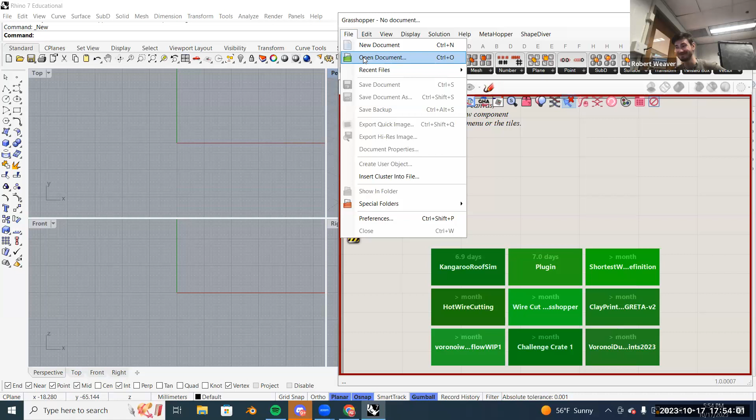So, did you ever 3D print Roadmap? Not yet. We can print a lot. I do want to print a lot. Yeah. Okay, cool. Yeah, that could be possible. I'll do this.

Okay, so let's do some Grasshopper. Leah, were you able to figure it out? Yeah, it's great. Several pages. Sean, what are you doing? Nice. There's some crazy stuff in there. Squiggle. Mesh inflation, that one's fun. But we already did Kangaroo, so we can only get to so much. Inflation shoe. Crystalline shoe. Okay, so today we're making a shoe. Let me open up this other file.

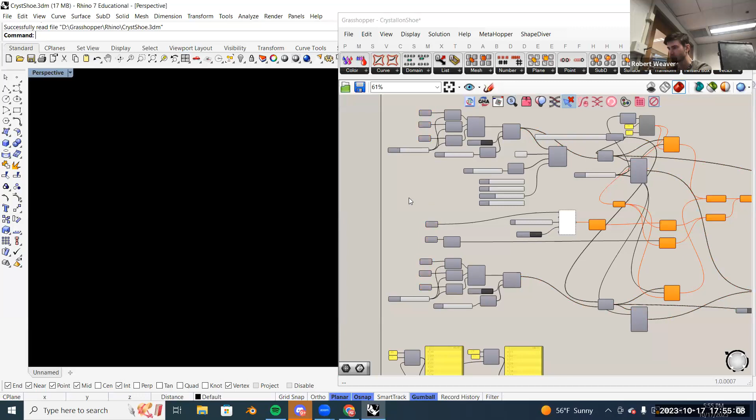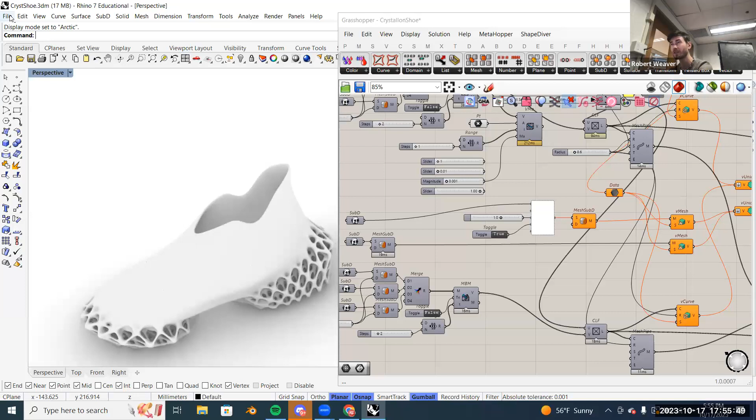This is the goal for today: the midsole texture, the lattice structure. I'm gonna give you this Rhino file because it has the upper and this middle bridge part. We can talk about how to make those pieces since it's with the SubD tools in Rhino 7. You need 7 to do that, or you could do it in Blender because they have very similar tools. But I'm just gonna give it to you.

Okay, so if you grab that Rhino file and open it up, it should have the mesh in there that you need.

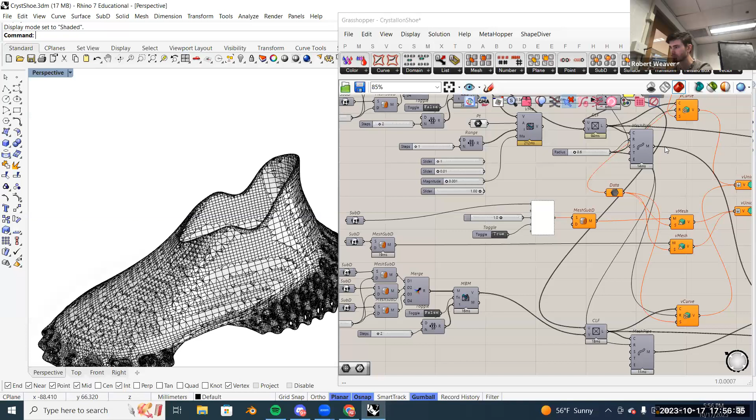No, wait, yes, I mean actually it would be. I can't not overhear you, so it was great, it was pretty gross, yeah. Did you hear the first part of it? Uh-huh, okay yeah. Joe Rogan's like on the show. It's like he was talking about it a lot. He was like, yeah, that was not okay.

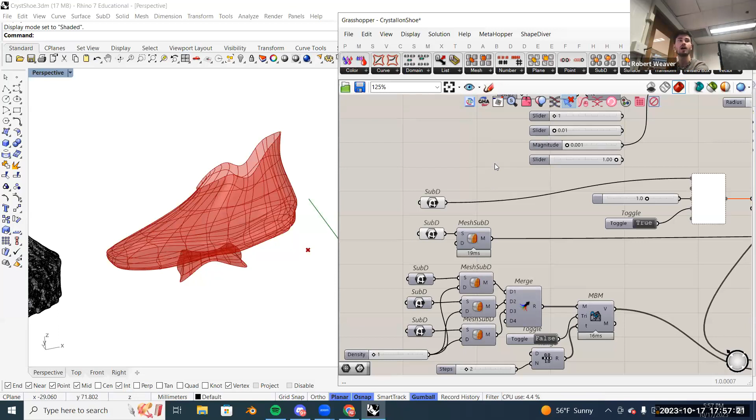Actually, with the people that have Rhino 6, let me know if it opens correctly. I mean it wasn't. It does not. Okay, let me fix that then, because you guys don't have SubDs at all. It has to be saved. Oh, I have a converter. Oh, I see what you mean. Okay, there's one, yeah, I can save it out as 6.

I was more interested in if the SubDs will come up.

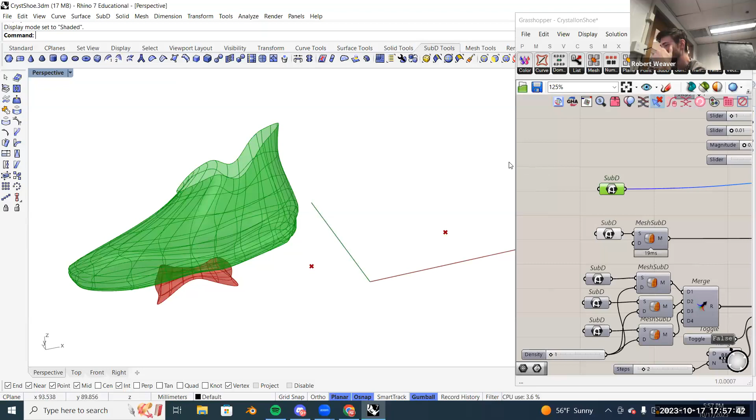It's been a long day. Yeah, I know it has. I haven't done anything on there, but it's still been on. I skipped my physical class, then did laundry and built the top words.

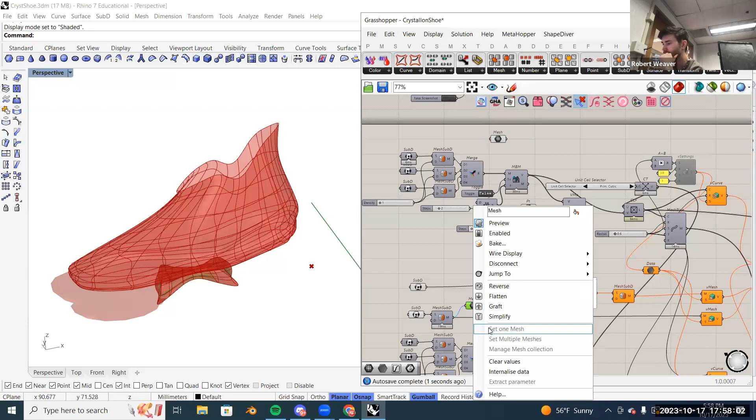This one was good. Yeah, I'll put a Rhino 6 there in a second. I'm just gonna change some things around just because SubDs I don't think will work.

Okay, grab that Grasshopper file, it should work in any Rhino. Does it matter if we... okay, yeah, that one, there's just meshes in the Grasshopper file to start with. The second one, yeah, the .gh one.

Wow, yeah, I had like 10 different companies like that and I still.

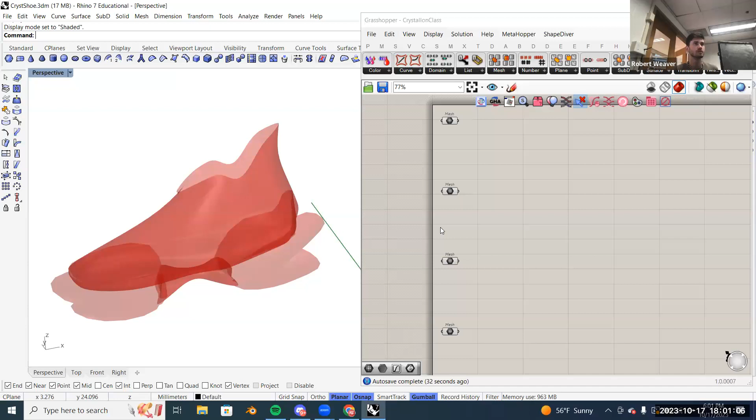Oh, I'm done, okay. But I don't know if the nodes just got their back or if they're deleted, because I clicked no a couple of times. Well, all I gave you was 4 meshes, there's nothing else in this file. So it should be pretty simple, I was assuming, because this has worked before, but weird.

Try to open the file, just the file. I go to file. No. Thank you.

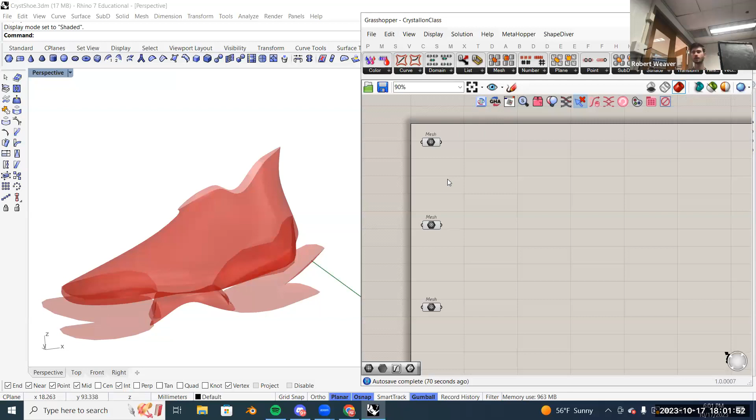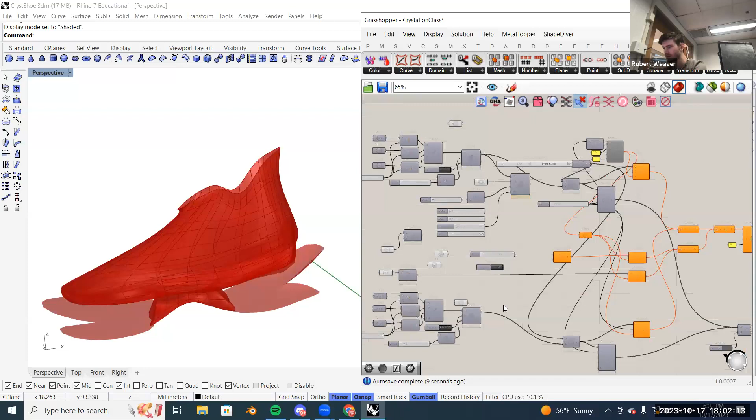Take something going at 1 speed and make it go 120 times less speed. It's like a gear. The input is the small gear, the output's the big gear. You get a bunch of torque.

That's the same, I was supposed to go on the sheet. How big is that? Depending on it, I have about 60. But I think I might have everything like that. Okay.

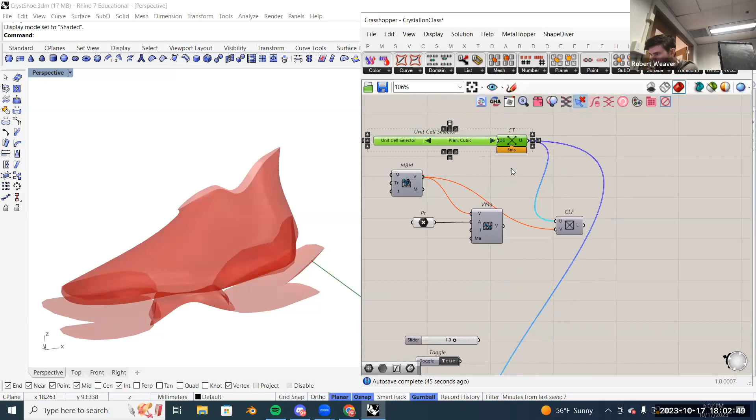Yeah, it's solid steel.

So the components of Crystallon is a lattice-based plugin, so it can do a lot of lattice structures. The nice thing about it is these aren't like plugin components, they're all just clusters of other Grasshopper components. So if you want to dive into them, you can see how it was built. But because they're just Grasshopper components, you should be able to open the file with the components in it, and you'll still have it even if the plugin's not working, which is nice. Let me know if that works and you can see them.

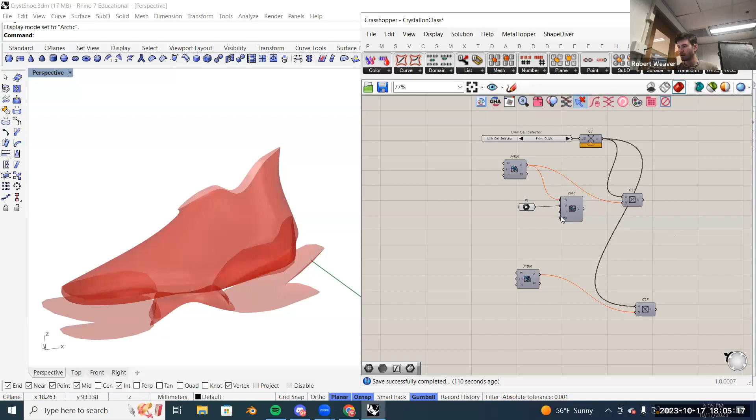Okay, everyone else, everything working so far? You got it all open? Cool. So we're gonna take the shoe form and convert that into the final model I showed a second ago, with the midsole and the parametric texture on the bottom.

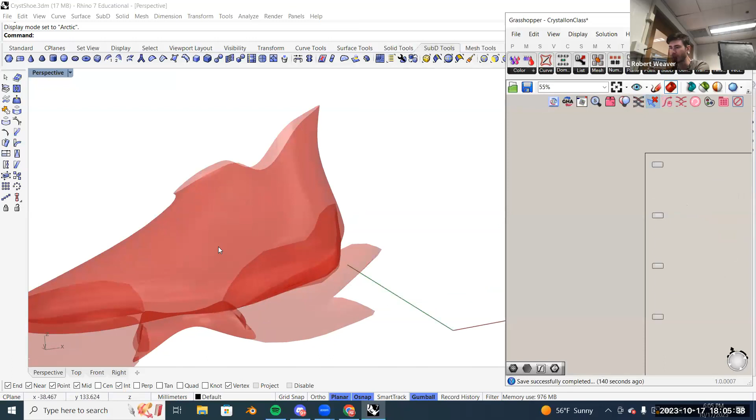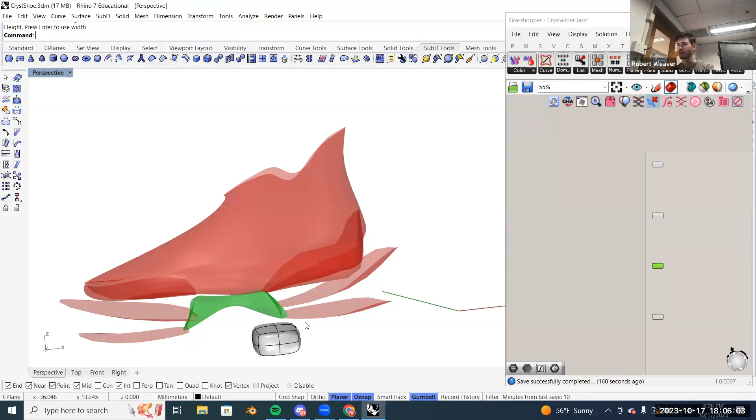To start off, there's a few ways to make the meshes that I gave you. Right now the most detailed ones are the upper, and then this kind of spanner in the middle. Those are both made with the sub-D tools in Rhino 7. So if you have Rhino 7, we have the sub-D panel where you can... I'll show this quickly and also show it in Blender, because you can do a very similar thing if you don't have 7.

In 7, you can create any primitive. I'd recommend grabbing the box primitive, it's the easiest one. Then you can come in and actually move this box to make it look more like that green piece. Working with sub-Ds in Rhino, if you hold down Control-Shift on the keyboard, you can click on certain components of a sub-D. If you just left-click, it'll do everything, but Control-Shift lets me select certain sections and pull them out to get a different look. Doing that, you can quickly get to something like what I have down there.

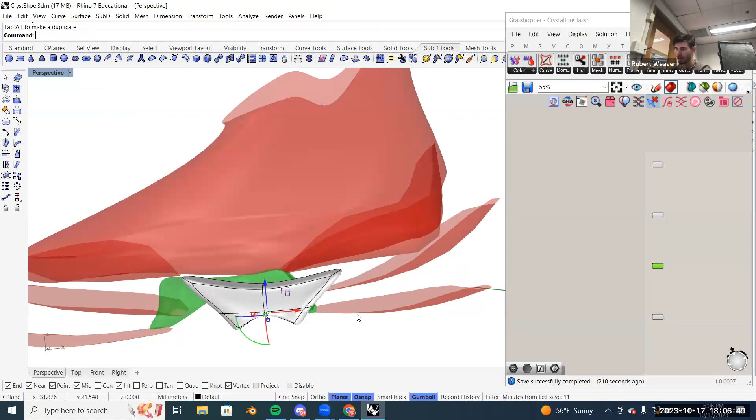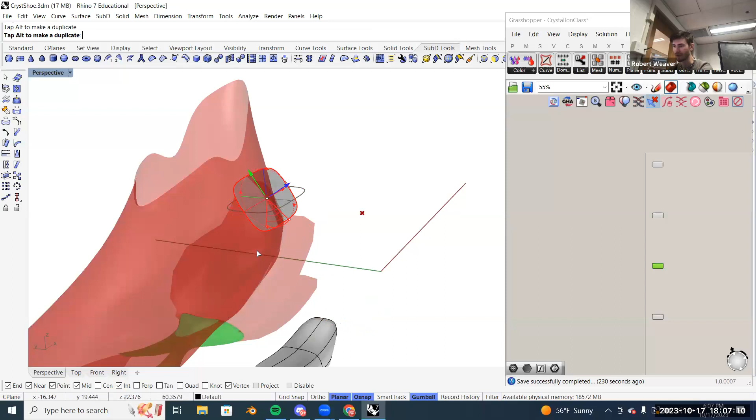And it doesn't have to be a solid form like this, you could just do a surface, like for that shoe. So if you're going for something 3D, I'd recommend starting with the sub-D box, it's super easy and simple. If you want to do a surface, you could start with the sub-D plane, it's just a 2D shape. Then you can take that — it took a while to get to this point — but the same process applies: you move it into place, and holding Control-Shift, you move around certain elements of it to get a different look.

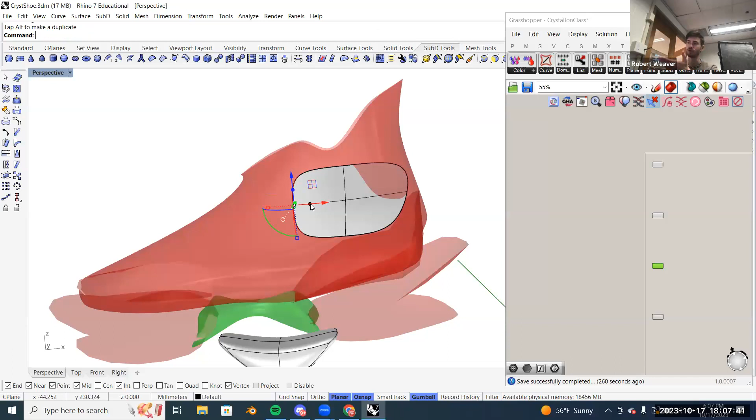If you want to add more faces, I'd recommend adding a lot more faces to this—there's only so much you can do with 4 quadrants of a shape. If you do Control-Shift and select 2 lines, it's the same thing we looked at on one of the first days with the gumball. You can move the surface, or use the little tiny circle to add more, and then keep rotating and adding to your surface.

There's a good way to do it for a shoe—a clean topology way. I would probably start with a band going around the outside, then fill in the bottom, and add more as you go up and down with the shoe. But it's kind of up to you, however you think is best to model with surfaces. That's the basic gist of it—if you wanted to model, you could play with surfaces and move them around.

We can do this in Blender as well if you don't have Rhino 7. It's pretty much the exact same process, just the UI is going to be slightly different. So I'll show you that when that pulls up.

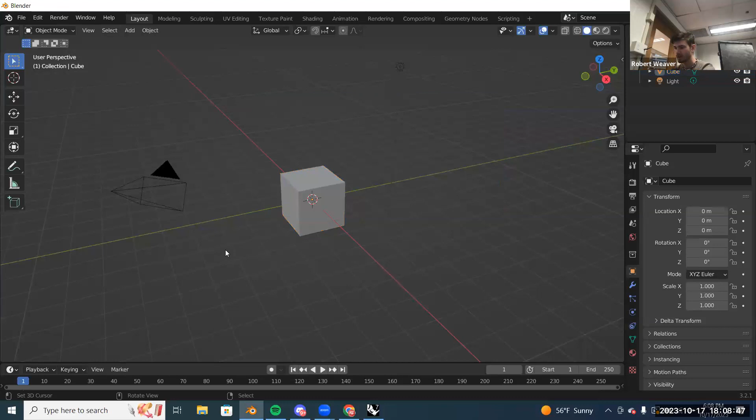Okay, so in Blender, you can add shapes in a similar way to Grasshopper. If you want to add anything—we might have gone over this before, but I'm not sure—up in the top, as soon as you open a fresh Blender file, we can also add in a plane from the mesh tab. This looks, starting off, quite similar to the SubD tool in Rhino. One thing we can do, because in the SubD tool when we add a plane we get those rounded corners—it's not a perfect square.

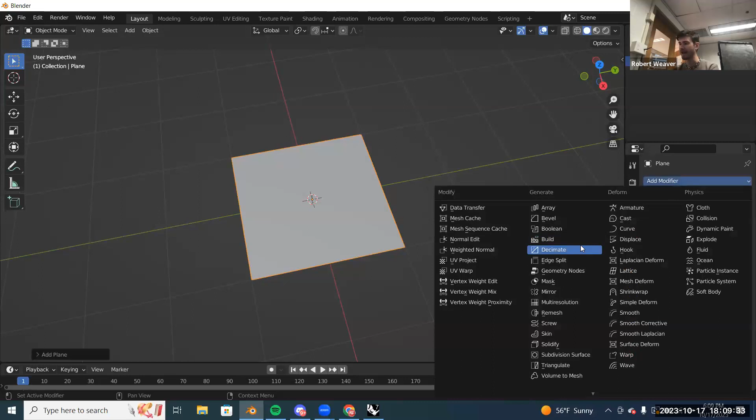So in Blender, to enable the SubD mode, we can add a modifier to the surface. Right now it's just a flat surface. We have this modifier tab over on the right side, and we can add a subdivision modifier—so the name tracks—and that'll make it more of a rounded shape.

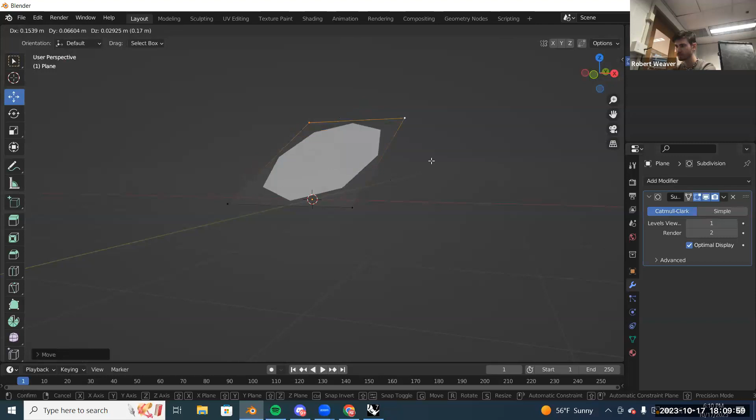To start editing this shape, if you want to add more loops or edges to make it more complex, we can do that in edit mode. Right now we're up in object mode, so if we switch over to edit, we'll have the control points of the vertices. We can move them around, turn on the gumball, and rotate them with the gumball, or by pressing R on the keyboard.

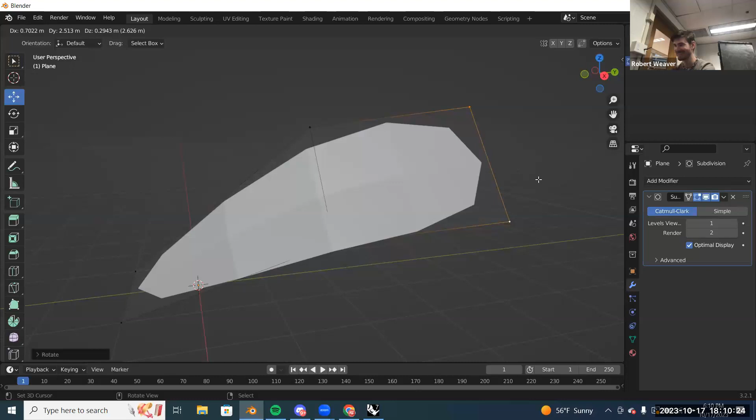And then we can add more faces. The gumball in Rhino was nice because we could move that little circle. In Blender, if you hit E on the keyboard, that'll add another face—I'm trying to figure out what E stands for. Yeah, there it is—it'll extrude, and then we can keep doing that, rotating, moving, scaling, anything you want to get a more complex shape.

At this point it doesn't look too smooth, and you can update the modifier to make it look a bit better by adding more levels of subdivision for a higher poly count. One other thing to note: if you 3D print, you'll get this shape, but visually, if we go to object and shade smooth, it looks perfectly smooth. For printing though, it's best to keep it flat, and we can just raise the subdivision level to get smoother surfaces. So that's the way to do it if you don't have Rhino 7.

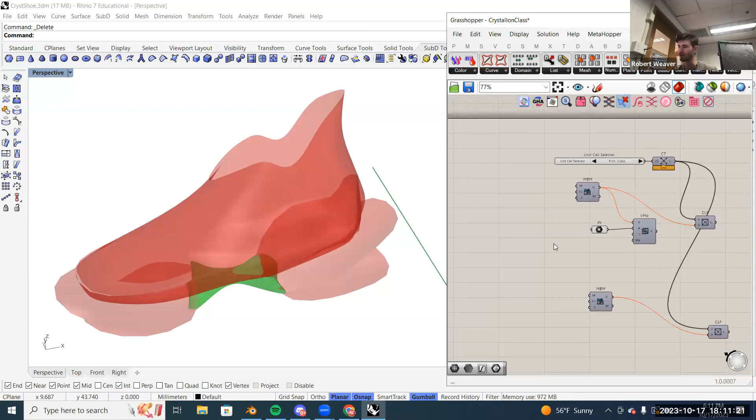But that'll get us basically the starting shapes that I have in the Rhino canvas. So going to the workflow, if you have Crystallon, or if you opened up the file that I shared with everyone—okay, so we're going to start with...

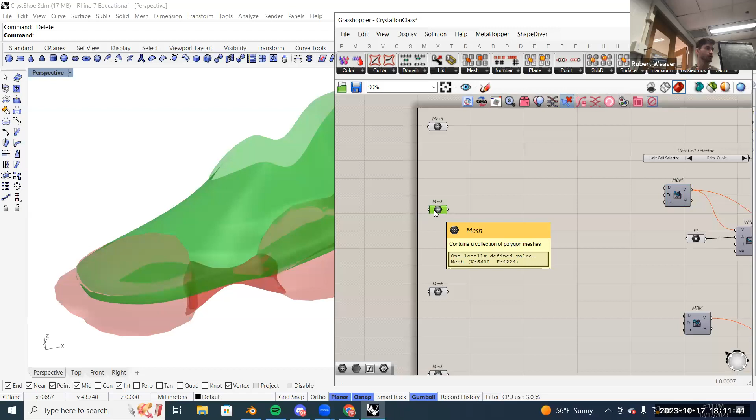Actually, we'll start with thickening the shoe first. If you notice, the second mesh is the shoe upper form. Right now it's just a surface, so it has zero thickness to it. The first thing we can do is add some thickness so that we can start meshing it with the rest of the shoe. It's quite easy to do that.

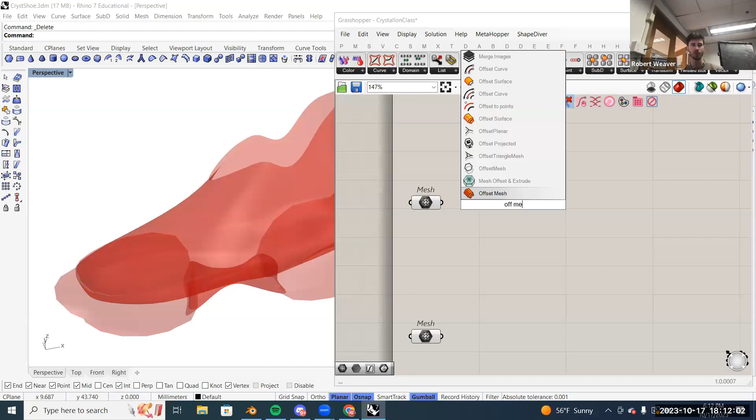We can do an offset mesh, and since we have a mesh shared with everyone, we can easily offset it with this component. The way I was originally working was with sub Ds, so I still had controllability over the sub D in Rhino, whereas with the mesh it's a little harder to control if I want to make updates later on. But that's just a workflow thing.

For today, we're just working with the meshes I gave you. The Fennec plugin has an offset component for sub Ds, which isn't something that comes with Grasshopper, so if you want to offset a sub D data type you can do that with Fennec. But since we're keeping it simple, we can easily offset a mesh. I think this is a Pufferfish component, yeah.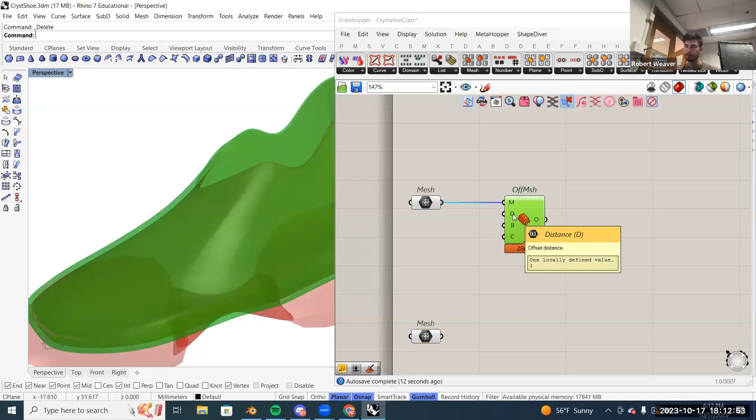So that'll offset the mesh. We can wire the mesh into the mesh input there, and then we'll automatically get a thickness. We can control the thickness with a slider in the distance, and you can do that if you want.

Happy birthday. Thank you.

But the number of 1 looks pretty good to me right now. So you can add a slider if you really want to. I think everyone knows how to do that at this point.

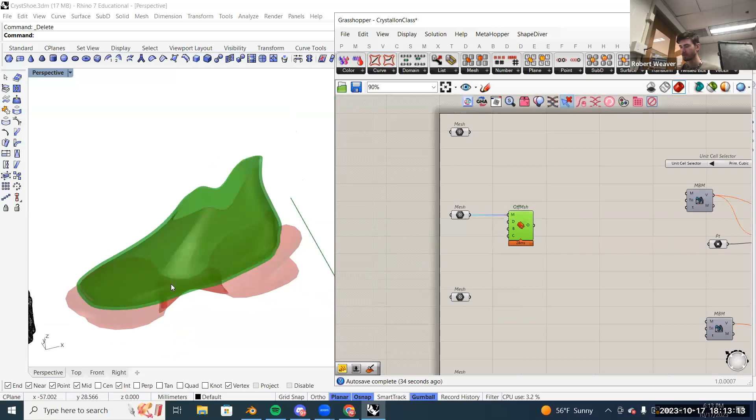Does this close the mesh? Yeah, that's a good question. By default, it does. If you look at the C input at the bottom of this component, that's create solids. You could set that to false, and then it would just offset the surface without closing it off. But that is a good question.

You could also extrude both sides with the B input. So you could just do a negative of whatever's going into D, and that'll extrude off both sides, so it's more even.

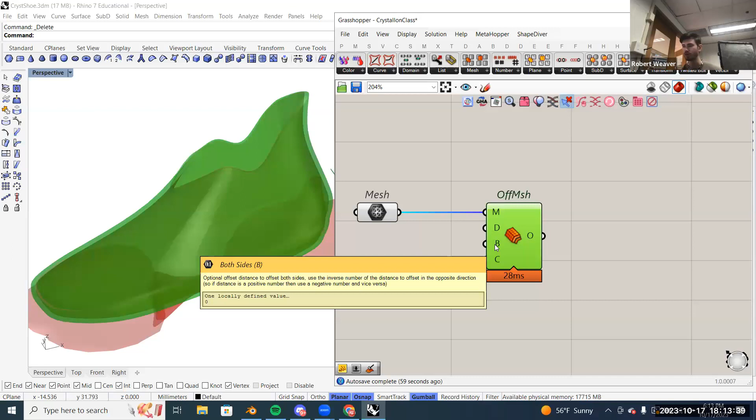What, toggle that one to false? Yep, exactly, that's a good point. That's the best way to do a true-false input, is to just grab a toggle. And then if I go to false, it's now just exporting the offset surface and not the whole thing.

For this one, the goal is to use Dendro to union the upper to that middle piece, and then to the midsoles on the front and back. So we'll use Dendro at the end to put everything together. But if we know we want to use Dendro at the end, we'll have to have everything as a mesh with thickness to it so that we can create a volume, and then use that volume to union everything together. That's why we're offsetting it as a solid.

So the third mesh icon already has a 3D mesh in it, so we don't have to do any extruding to get that to be solid. It already is quite solid.

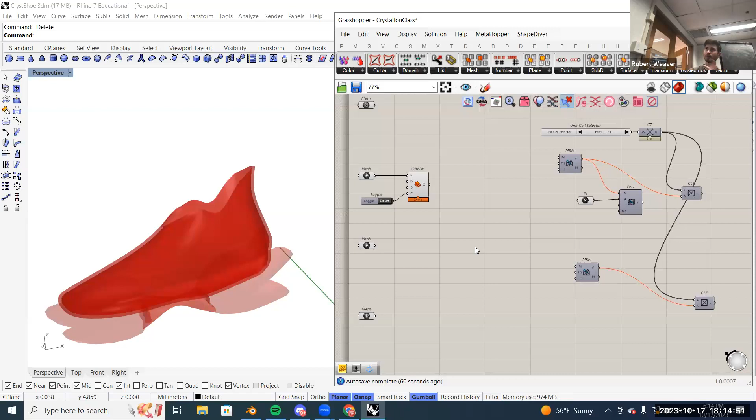We'll come back to that as we go into the meshing steps later. But to actually look at what Crystallon can do, there's a lot of components that come with it. We'll only touch on a few today.

Right now, the easiest way I found to make a lattice structure is to use, let's see, if I click on this top one, we can see that, similar to what Pufferfish can do, it tweens between surfaces. We touched on that with the twisted box workflow. We can do a similar thing here where we can control the density of the lattice structure with how many meshes we have in between.

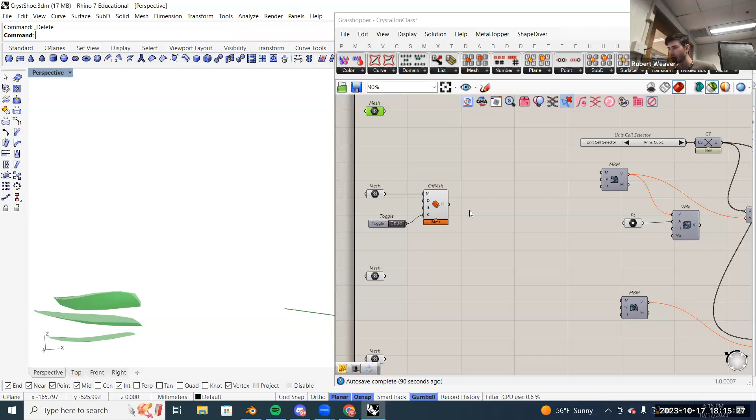So if we have these 3 meshes, we'll do one lattice structure between the bottom one and the middle one, and then a second between the middle and the top. So the first and last mesh input both have 3 of those surfaces there.

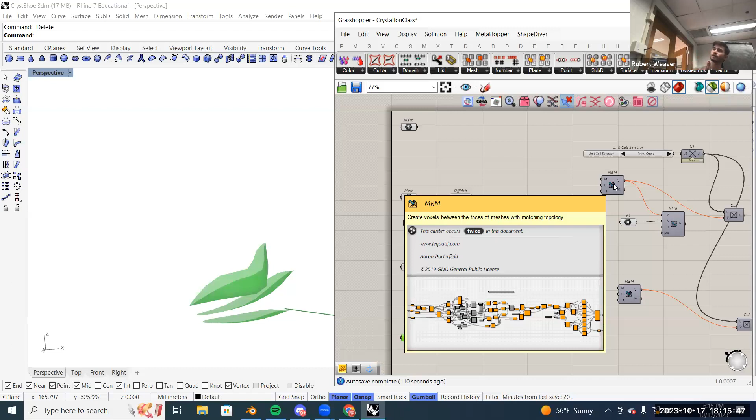The Crystallon component we'll be using is this mesh-between-mesh component, so we can construct a lattice structure between them. If you hover over that, you can see what's going on inside, because it's a cluster, so there's just Grasshopper more inside of this. If you want to edit it, you could look inside to see what's going on, but I'm not going to click on that right now.

But the basics with this one is we need meshes to morph or tween in between of them. And then the other thing is we can switch between triangles and quads depending on what kind of cleanliness we want for the model. And then the last one here, which is going to be more fun, is we can control the number of divisions, so the number of lattices in this mesh.

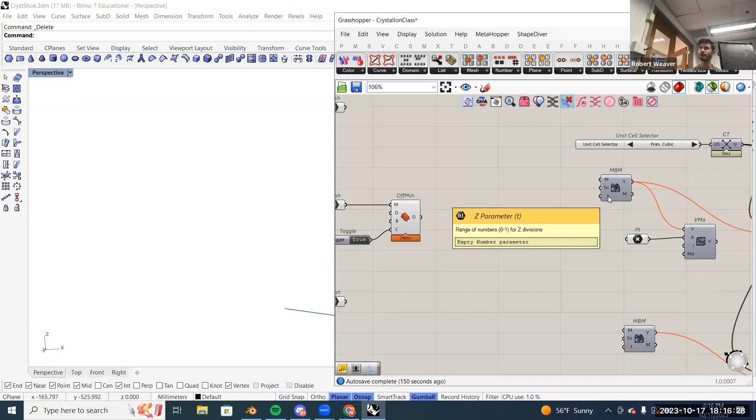It's easy right now with the mesh I gave you, it already has 3 meshes in it, and those are in order. It's important to go in order, just like with everything we've done in this class. So if I start at the bottom, then go bottom, middle, top, that would work well.

So you can pull this over closer if you want, or if you're doing this from scratch, if you find the MBM component in Crystallon, you can pull that in.

It's not going to do anything yet. We have to fill in the other 2 inputs. So the first one, triangulate or quad. If ever it's asking you for one or the other, it's more than likely going to be a toggle Boolean. And in this case, it says false if mesh or quads. So we'll grab a toggle component so we can define that. And we'll just keep it at false because quads, in my opinion, are slightly cleaner for doing these kinds of lattices.

And then the last one is that lowercase t input. And the lowercase t input usually denotes a parameter. In this case, it's going to be a range as it asks from 0 to 1. And with this range, we can control how dense the lattice is going to be. So a range, if you remember, is a little bit more complex than just a slider. It's going to be a whole list of values, but we can control it with a slider still.

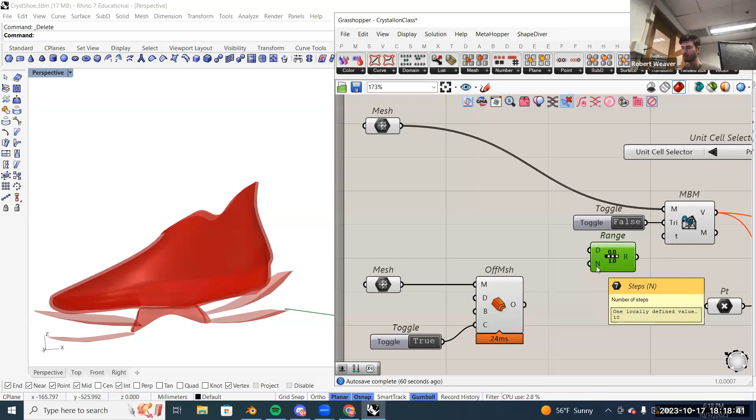The one thing we can change though is the number of steps. By default, it's at 10. So I'm going to plug this into the parameter value from Crystallon, and we can see it start to update there. But we can control this density with a slider in the range. So by default, it's 10. But we can do a slider, say 10 is too much. We can just go from 1 to 10 as a slider, and then we can have some control below that range. You can go above 10 if you want. It's up to you. But we can plug that slider into n. So n is going to be the number of steps.

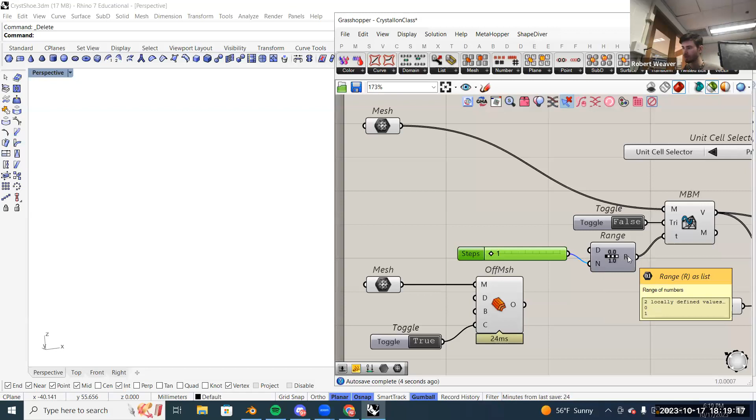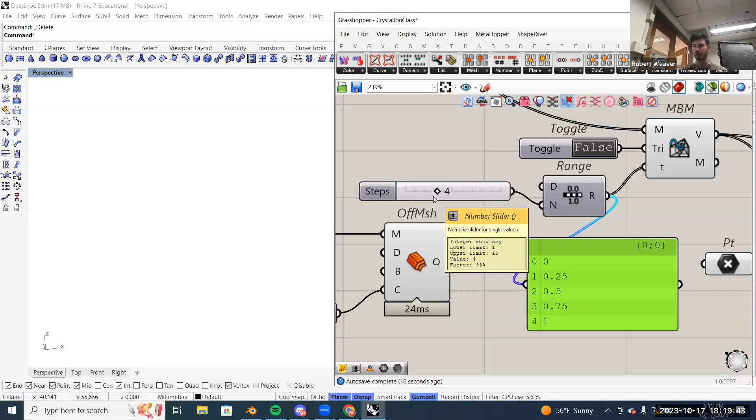If we look at the output, let me get a panel, and you don't have to do this, but if we look at the output of the range, as we move the slider, you'll see we'll get more values in between 0 and 1, and they're all evenly spaced with this component. One thing to note is it's always going to give you a number of values 1 above whatever the slider is. So if the slider is set at 4, we're going to get 5 values coming out. And that's just how it works. But if we look back at the Crystallon component now, as I change this value, we can see that the number of times we tween between each of the surfaces will grow.

But that doesn't work if you don't have this one. It should work even without the plugin, okay, just because the Crystallon plugin is made up of simple Grasshopper components. All they did was put them in a component and then upload it as a plugin. But compared to all the other plugins we've looked at, which are all packets of Python code, this is just packets of Grasshopper. So it should work. Is it working for you?

Oh, is it working out? Yeah. Cool, cool. Nice. So like dark. Okay, yeah.

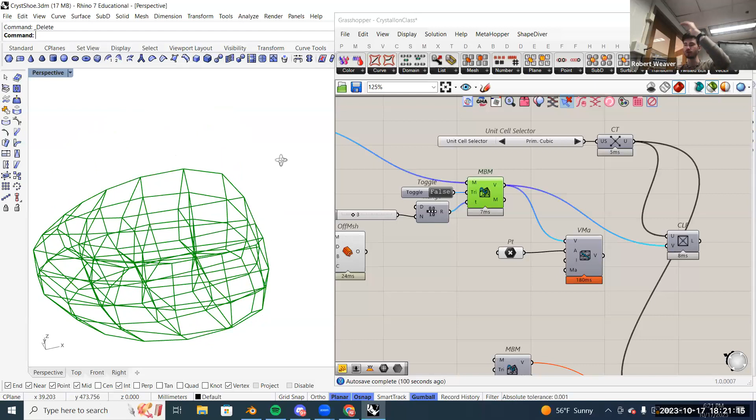Okay, so at this point, what we've basically done is constructed a twisted box. If you remember from the Pufferfish workflow when we did twisted boxes, it's the same thing here. So we have those 3 meshes now converted into a volume of boxes controlled by our slider. So in this case, my slider is set at 3, and it looks like we have kind of 3 rows of boxes going up. And they've morphed to the topology of the surfaces. So that surface that interfaces with the foot the most is the most curved.

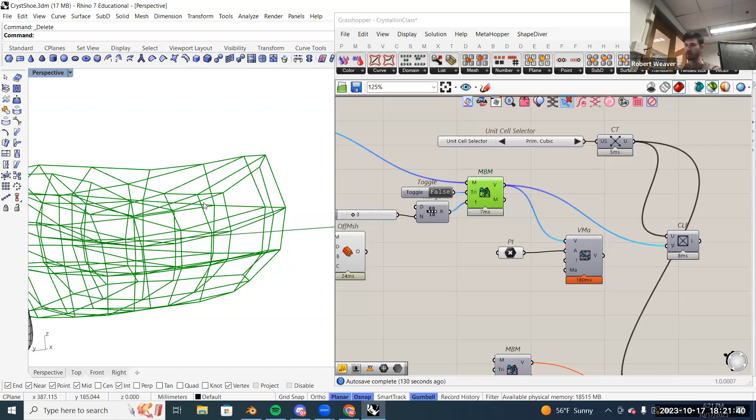So if we look at like a side view, you can see how it's being morphed as it goes between the 2 surfaces. So it's really easy to control. If you just change the input surface, you'll get a much different output without too much effort.

So once we're at that point, we can actually start filling this with a texture or an infill. And we can select that pattern with this section I have up at the top.

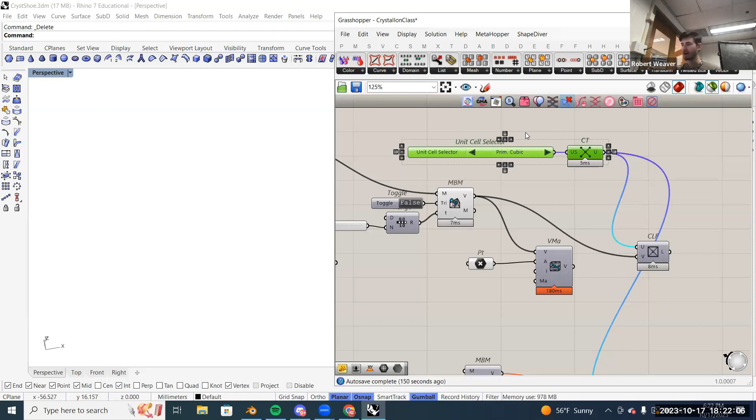So the unit cell selector has a lot going on in it. If I put it to a checklist, we have all these different options of what we can do with it. If you remember back to Mesh Plus, when we were doing the Twisted Box workflow, we could use Mesh Plus to define what kind of volume we wanted inside the Twisted Box. It was a very similar setup to this. In Mesh Plus, we could pick which volume we wanted from this list. In this case, we have a selector that we can just flip in between.

Right now, all this component is... let's see. All it is a value list or a digit scroller. They're kind of the same thing. It's like a different way to do a number slider, just with increments.

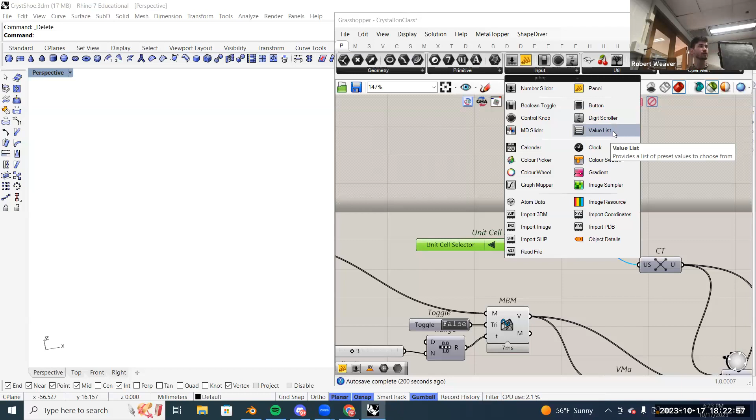So you could set this up by yourself, but the one I've given you is the one from Crystallon. This is the one that's set up with their very specific values coming out. So you can see as we change this, it's basically just outputting a different integer value that Crystallon knows is a different thing. So that's all it's doing. It's just named nicely so we know what's going on.

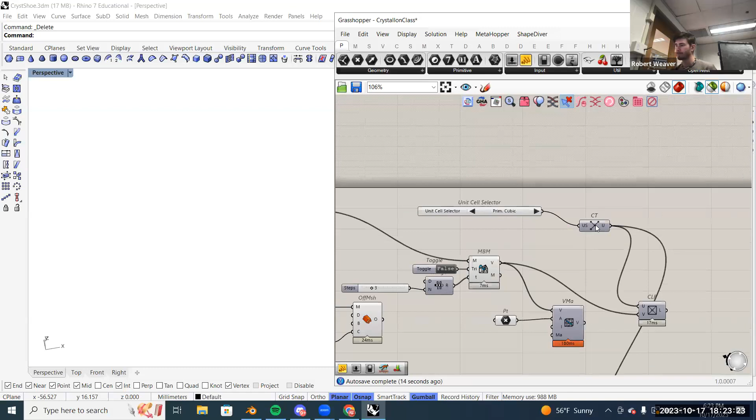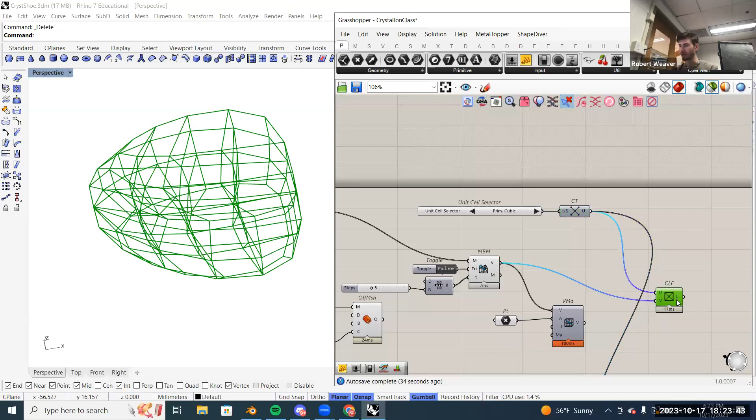With the CT component, if you look inside, we can see basically it's a lot of meshes of different volumes. And with the unit cell selector, we're just selecting which one we want to fill in the twisted box. So it's pretty much exactly the same thing as what we were doing in the pufferfish twisted box workflow, it's just that they put this all in components for us. That's the nice thing about plugins.

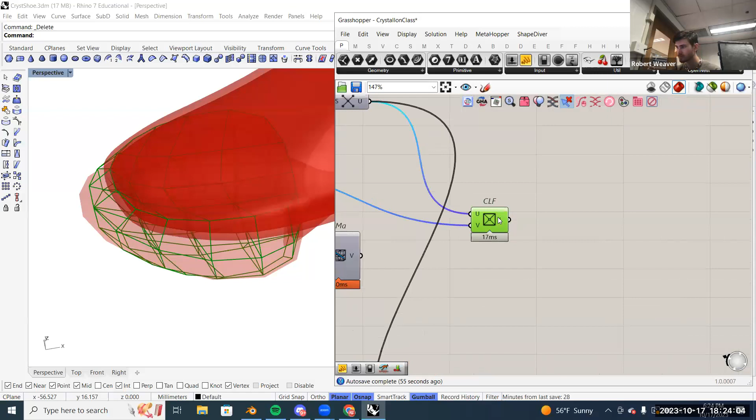With that, if we preview on the CLF component, so we're filling the voxels with cells, it should be outputting a lot of curves. By default, right now we have the primitive cubic selected, so it's just gonna give us a solution that's the same as the twisted box, which we don't need for this. If you switch through the unit cell selector though, we can see a bunch of different textures coming up, represented as curves in Rhino.

So there's a lot of different settings. Which one? Ooh, I do like that one, yeah. So you can pick whichever one you want. It should work for this.

There is a point though when you get through the list that the workflow might break, but I'll leave that up to you to find. I forget what the cutoff point is. Okay, yeah, it's the shell ones. I don't know what exactly those are, but it's not working for this workflow. So anything before the shell option should work just fine.

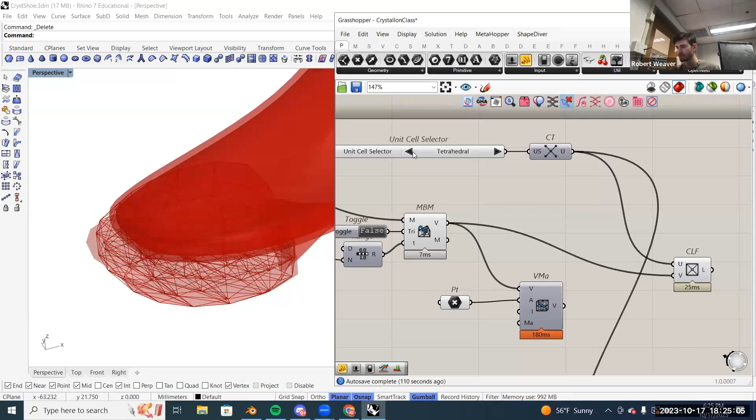Yeah, ask you for a new component. Yeah, don't have too much fun with it.

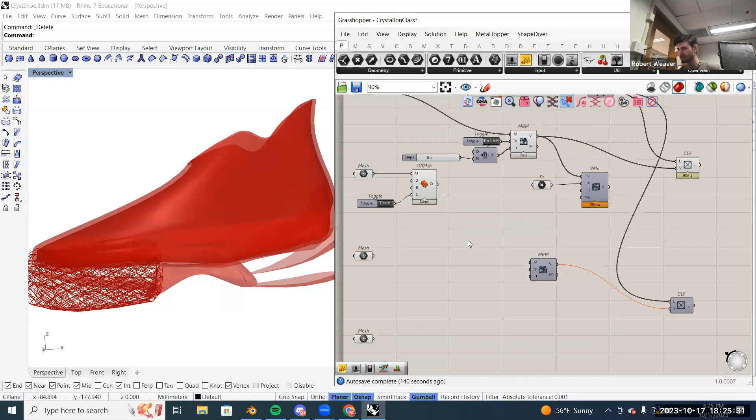So if you found a pattern you like, we'll have to do the same thing for the heel part of the shoe. I have the same component, or the same two components, in the Grasshopper file that I shared. So it's going to be the same process of setting up those two components. You could even copy over the toggle and the range and the slider and move it down to the other MBM.

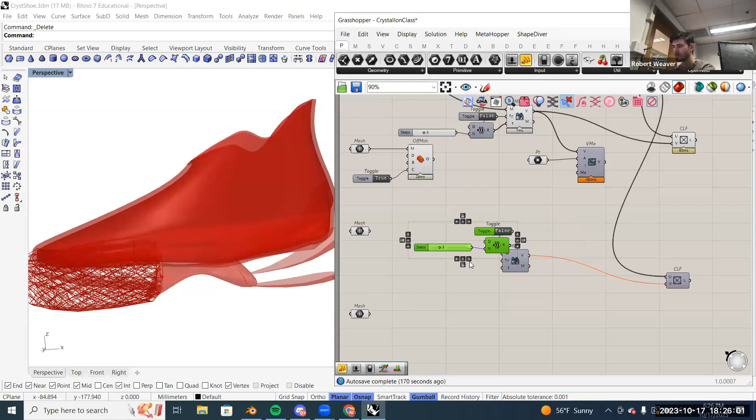And that should set up the pattern on the back as well. You can play with the slider between the two, they don't have to be the same number. They could be different, they could also be different patterns if you really want. If you want to change the pattern on the front versus the back, you would just have to duplicate the value sequencer and then the CT component, and just have a second one for the bottom part of the script as well.

Do you want to make a connection then? If you want to undo a connection, you could right click on... oh yeah, and then you can disconnect.

Child, it's the technical term for... yeah, no, we don't use that one anymore. What about without the connections? I don't know if there is a way to duplicate without, like if I was to copy and paste this one, it would take the connections with it. Yeah, what I would recommend is just like if I want to grab this component again, just search for it again.

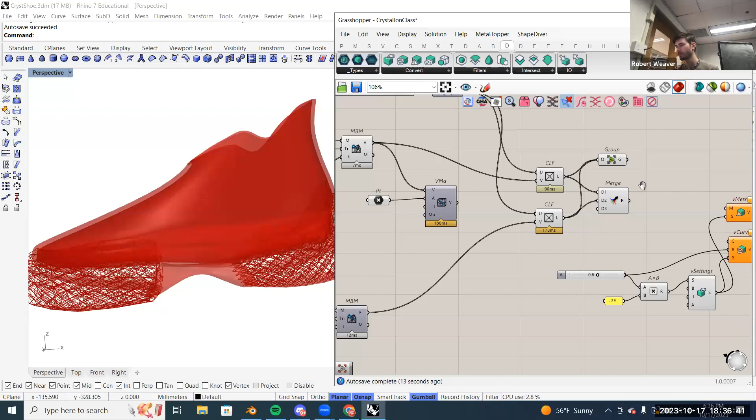If we take a look at the output now, it has a group with 3,000 objects in it. So now this is one line of data, whereas the merge is all of the 3,000 lines of curves. So you can pipe curves, but you can't pipe a group. You'd have to ungroup it back to curves, and then you could add the pipe to it. The group is nice though if you want to really compact things and then transfer it. The order won't get mixed up because it's in a group. I use it sometimes, but sparingly.

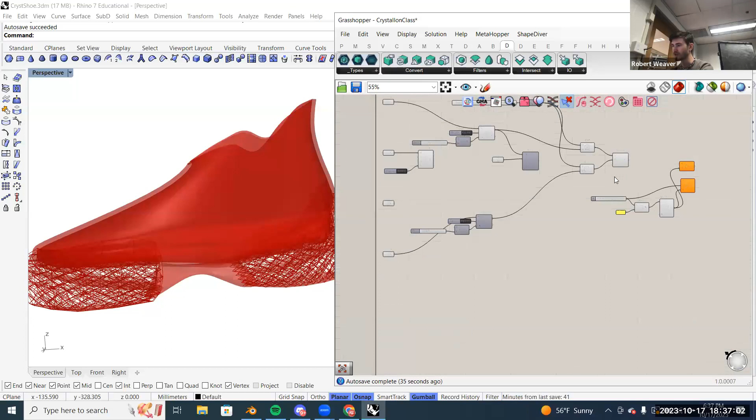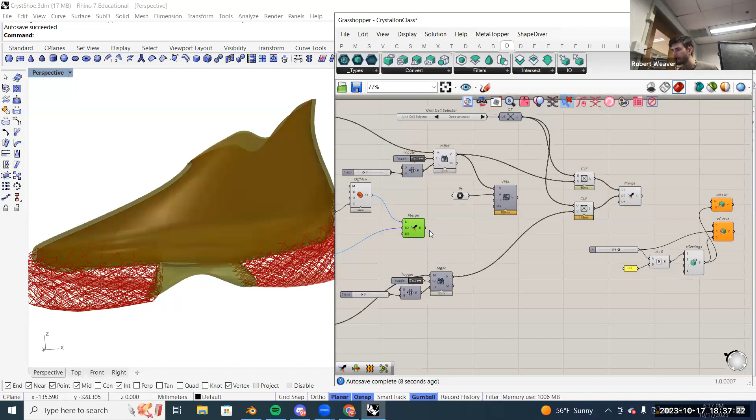So yeah, we've merged the curves together. We can also merge the meshes together. So if you look back at the beginning, we have the offset mesh, and then we just have that singular mesh component. If we merge both of those together, that'll be all of our meshes taken care of. So that should be the upper and then that middle piece. Does that make sense? I'll zoom out for a second. Okay, everyone got it all merged together.

Okay, so at this point we have the meshes in one merge and then the curves in the other. We can wire these in to their respective mesh to volume and curve to volume, and it should convert these into the volumes that we desire. My wires are crossing over, which isn't the cleanest way to work, but it should be visible enough.

So what makes the pipe? Is that the curve to volume? Yeah, it takes a curve, we take that radius and then go, okay, I'll make everything. Yep. It's one less step than making it a pipe and then using that mesh to make a volume. It just does it all for you. So it should be the fastest way to make a pipe if you know you want to volume union everything together at some point.

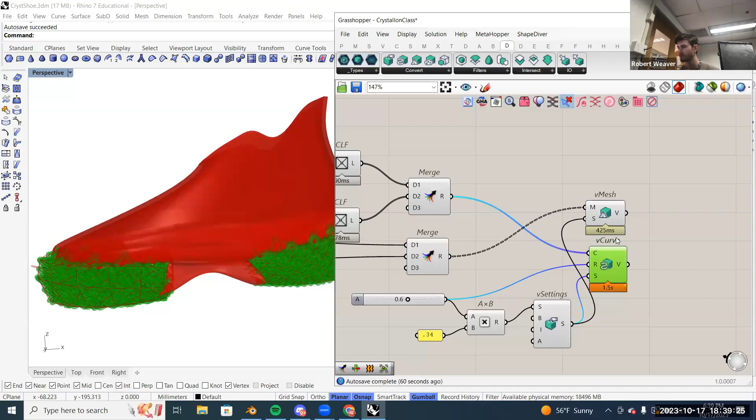So once everyone has the meshes coming together, the last thing we'll do is union it together, to make everything one. With the intersect tab, we've done this before, we have a volume union, and this component will take care of merging everything into one continuous volume.

With this one, it'll be good to flatten the input just because we want to union everything together, so we need it all on one list. If it's on separate lists, then we'll try to union everything on this list and that list, and then there'll be separate unions, so we'll flatten it to put everything together.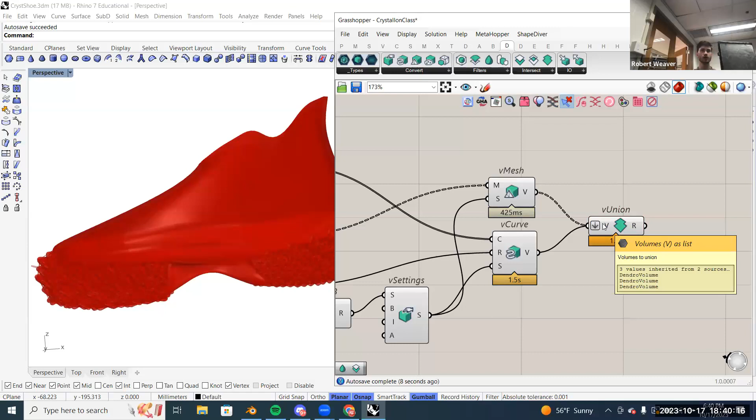Once it's flattened, we can wire both of the volume components into it. You can either use a merge component again, or if you're holding shift while dragging the wire, we should be able to connect both to that volume union.

That second merge, what are the two things that connect to it? With this one, it is the offset, and then just the mesh that's hanging out by itself.

It's a different data type, a volume that only works with Dendro. Dendrology, the study of trees.

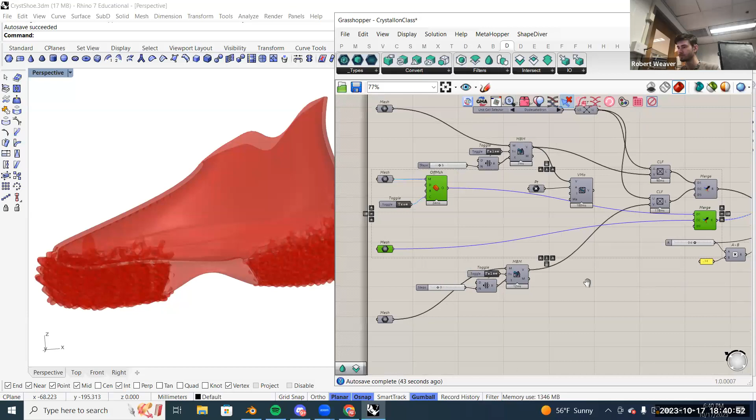Okay, so with that all wired up, the output from the union should be one Dendro volume. If it's multiple, then you'll need to flatten, it should just be one.

At this point, we can do the final steps in Dendro. Visually, it's up to you if you want to smooth, but we could add a smoothing component from Dendro under the filters. Smoothing will just take away some of the hard edges. It's up to you though if you want to do this.

The only necessary thing to do if you want to export this as an STL is to convert it from a volume back to a mesh, and that again is going to be under the convert. So we converted from mesh to volume, did an operation on it to union it, and then we just want to go back to a mesh before we export. So we can use the volume to mesh component to do that.

It's slightly shiny. Yours is special for some reason, it's always shiny, where everyone else's is like this ghosted thing. Mine is shiny too, nice. Doesn't matter though.

Oh, the last thing, yeah, so that is the volume to mesh. This will convert it from a volume state back to a mesh that we can bake.

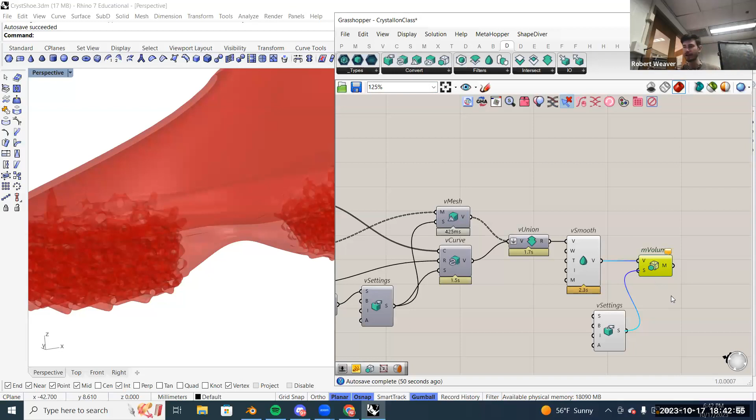Within the Dendro workflow, are you trying to do something, go in and do extra things? Technically these two would be the last thing you would ever do, but you could do a lot more in Dendro. You would just always have to have these, like converting it back to the mesh, as the last step. Is that kind of the question?

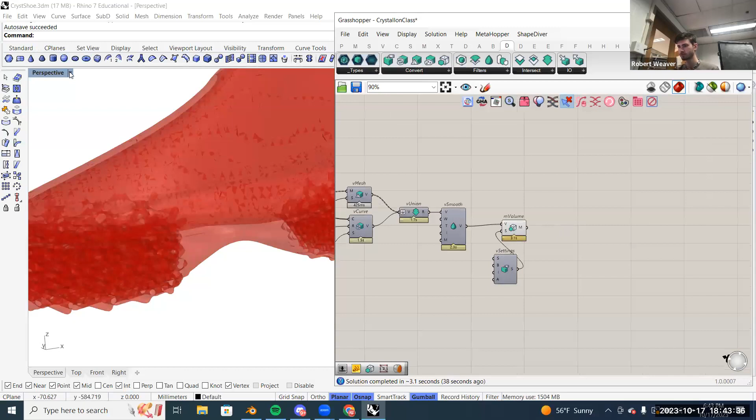Yeah, kind of, that's true. That's the main thing. Brownies are about it.

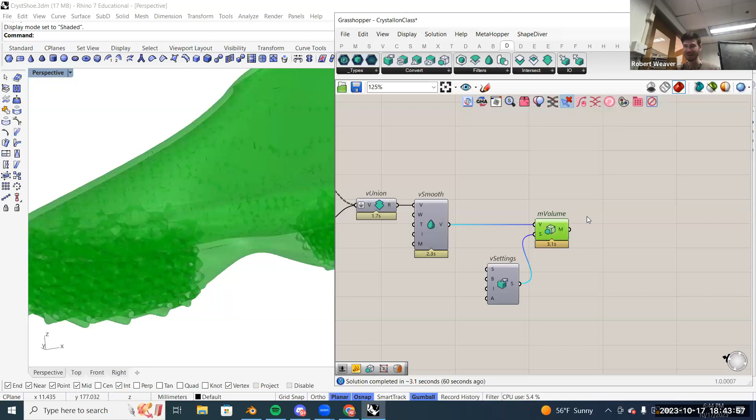What? No, I'm not answering further questions. What type of brownie? Yeah, yeah.

Actually, I came across a great baking meme this morning where there's supposedly a subreddit that just takes screenshots of reviews of baking articles, where the person substituted all of their own ingredients and then put one star because the recipe failed. You know this subreddit? I can find it again. Please do, that sounds amazing.

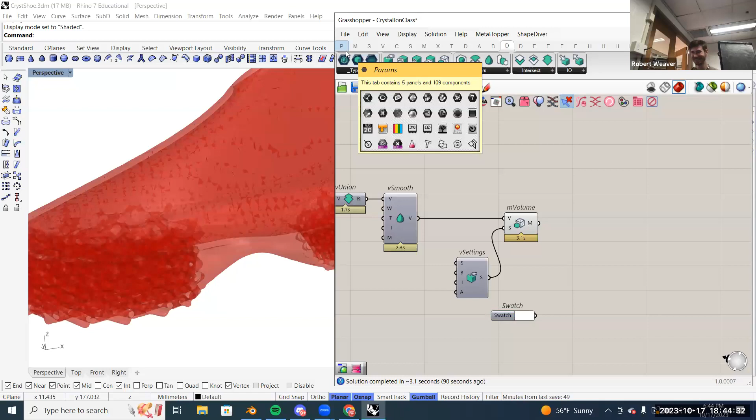It's like whenever someone asks a question on Amazon and some people reply, I don't know. That's my favorite, some people just love to hear themselves talk. I've done that a couple times, or once. Why not, the Amazon reviews where someone's so happy somebody replied, and then there's like, I don't know. Well, they can deal with it, I had to look at their dumb questions, so they can look at my comments.

Have you ever seen the reviews of laxative gummy bears? It's the sugar-free gummy bear, but it's like a five-pound bag, and it's always the same review, like, I didn't know these were laxative until I had eight, ten of them. It's like that one artificial sweetener, right, that acts as a laxative. Well, I didn't bring any of those in today, but all the cookies.

It looks like some of you have gotten to this step, but we can just use a preview component to give it a nice color, so we can see physically what's happening.

I think you could just change the preview value, like with the orange button. Yeah, pink's nice. If you put no color, it's just a nice pink.

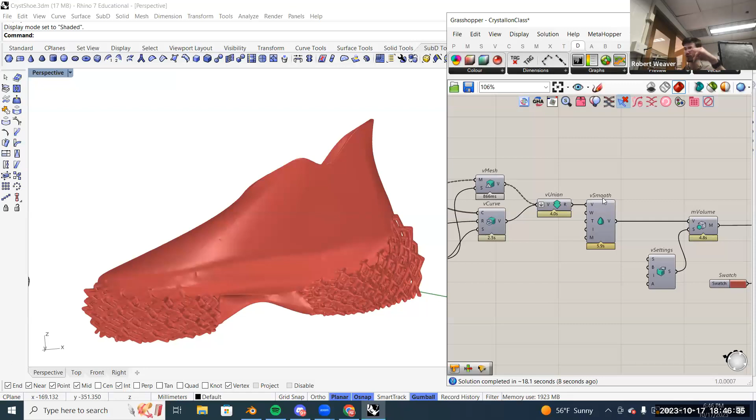Can you put like a SubD somewhere to have those very sharp things more cylindrical, so you get like a more organic shape? Yeah, it's a good question, sometimes I do that too. If I want to cut things out of my model and keep it sharp, you could do something and then instead of a union, just add a subtraction after that and cut things off. Yeah, that's a good way to work.

If you type in swatch, you can get an RGB slider.

Is that the end of it? Yep, just get enough color. The subreddit, I Didn't Have Eggs. Someone, yeah Austin, you can put that in the Discord if you find it.

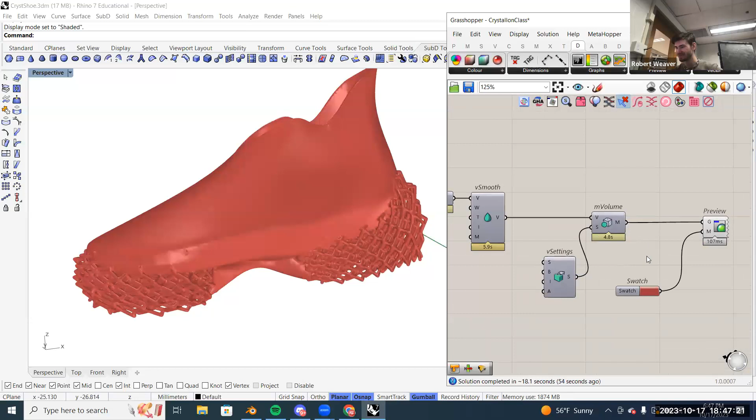So that slider that we have should affect that. It'll just take a second to update because of Dendro.

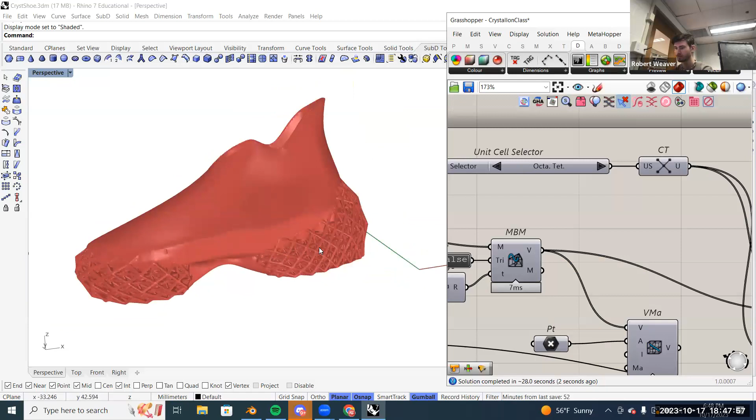It should get back at some point. So that's the end of the workflow.

There is one tip to make Dendro work a little bit better. I'm noticing I have this small hole here, which happens sometimes. One way I found to fix that is with the original settings component. We can add numbers into bandwidth and adaptivity. For some reason, this works. I'll leave it in the recording.

If we do a panel of 10 and 1, let me just lock this. Wiring those into B and A will solve any weird topology issues when you convert back to a mesh. This is insane, but that's a very niche thing.

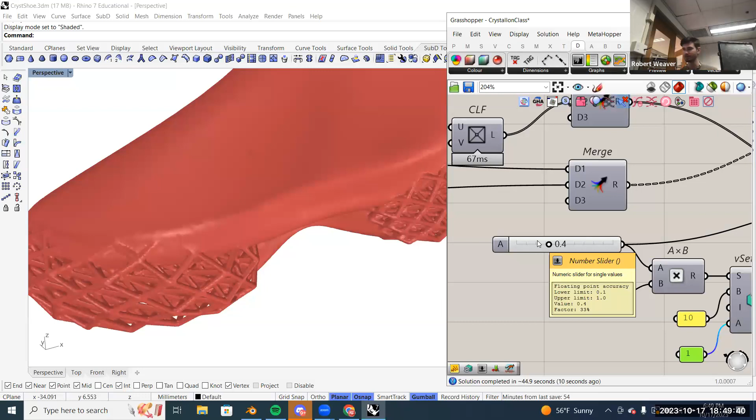The lower the settings value goes, the more voxels you'll have, so the sharper everything will be. So you'll have to come back to the smooth and then update the iterations value. At one iteration, it's barely smoothing anything, but if you do like 12 iterations, all those edges will be a lot more smoother.

A lot smoother. But just know the lower you go on the diameter of the wires, the lower the voxel setting is going to go, so the sharper everything's going to be. So you would have to make that smoothing value higher to compensate.

Does it work the same as like a subdivision modifier where you take the box and try to round it out, like Blender? Yeah, I'm not sure of the exact algorithm, but since we're working with tiny 3D pixels called voxels, I think it's just doing a Gaussian-like blur smooth between all of them and giving you back that geometry. So yeah, you're gonna lose detail everywhere.

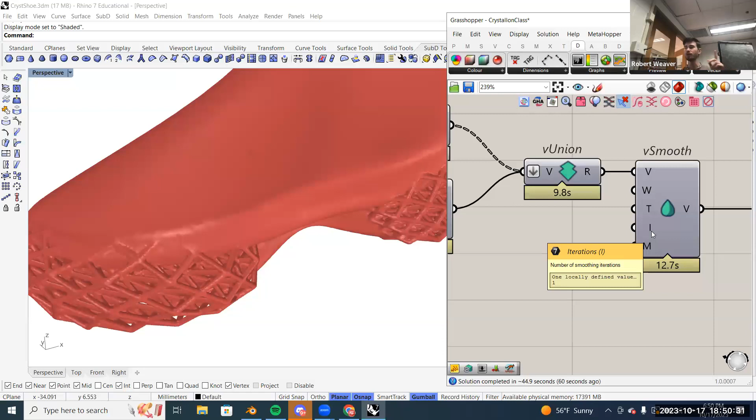One thing you could do with Dendro though, and if you guys want to head out, that's fine, we're just going over weird stuff.

But you can create a mask in Dendro, so you could say keep this area untouched by the rest of the workflow if you want to keep areas sharp. So you can play with that too, yeah.